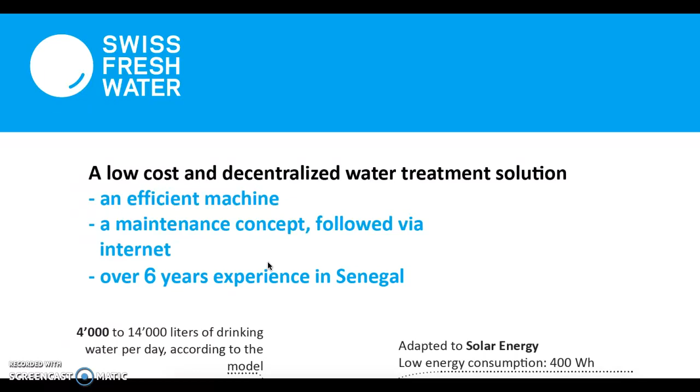So this is the technology that we are speaking about, and in our previous video we spoke about the project that we are going to implement in Pakistan, a country that up to 80% of its population is struggling to have clean, safe drinking water according to some estimates. So it's a low cost and decentralized water treatment solution that has an effective maintenance concept.

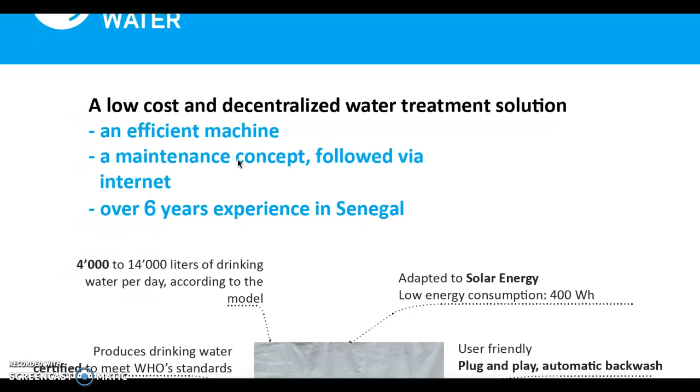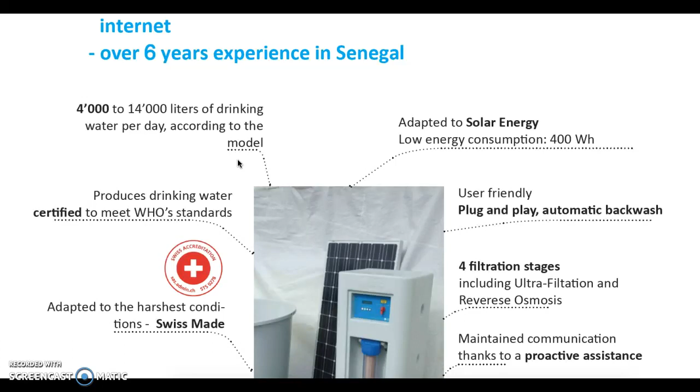So here's a clear advantage of this machine over any other machine: it has a clear maintenance concept that's followed via internet and which has over 6 years of experience in Senegal. So in Senegal, there are roughly about 150 machines that are running and doing very well, running at 100% efficiency, and all 150 machines are still in service after 6 years.

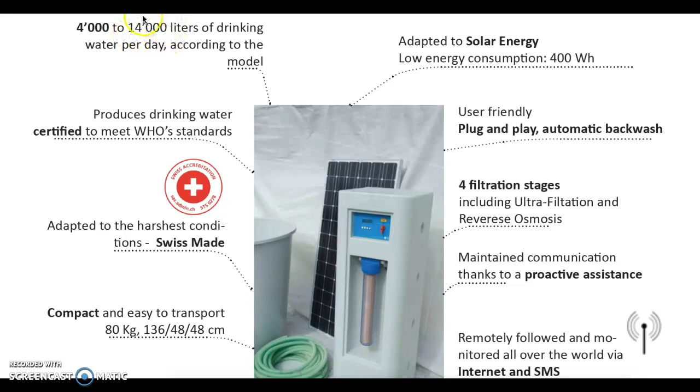Now, according to some models, you can tweak the output depending on whether you want a salt filter or not. With the salt filter, we're looking at 4,000 liters per day. And without the salt filter, we're looking at 14,000 liters of drinking water per day. As you can see, a very small and very mobile solution at 80 kilograms, 136 by 48 by 48. This machine will literally fit anywhere, and it's not difficult to transport.

With Swiss-made and Swiss accreditation, it's adapted to the harshest conditions, and it's very strong and robust. The advantage to this machine is that it produces drinking water that's certified to meet WHO standards. So we're looking at a high quality output, with a plug and play option, automatic backwash, 4 filtration stages, including ultrafiltration and reverse osmosis, and maintained communication thanks to a proactive assistance.

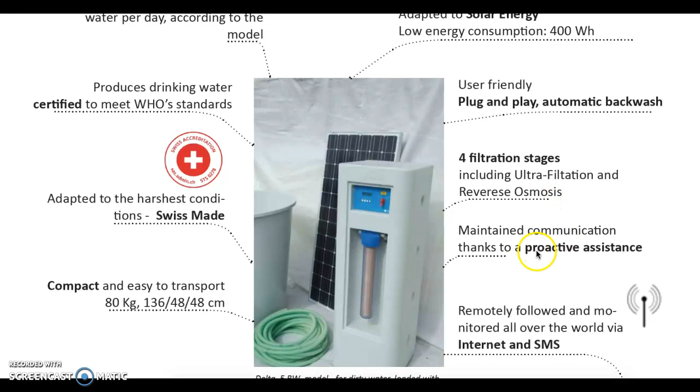So here's the advantage. Each machine is equipped with a SIM card that will give us all data regarding statistics, maintenance, spare parts, how everything is running. And as you can see here, there's also a solar panel in the background. So yes, the machine can be a completely off-the-grid solution. Here we see that in Africa, we have already embarked with several hundred machines, and all machines are fully operational.

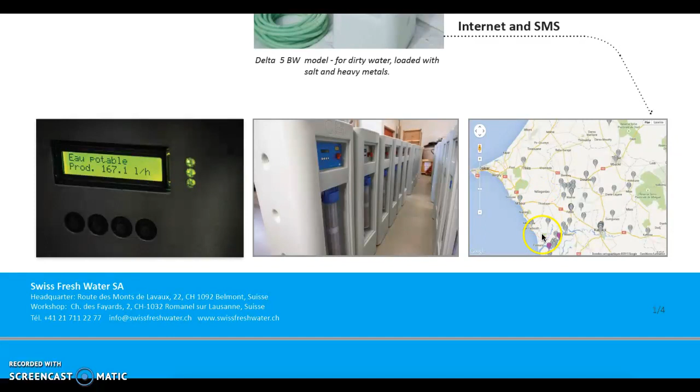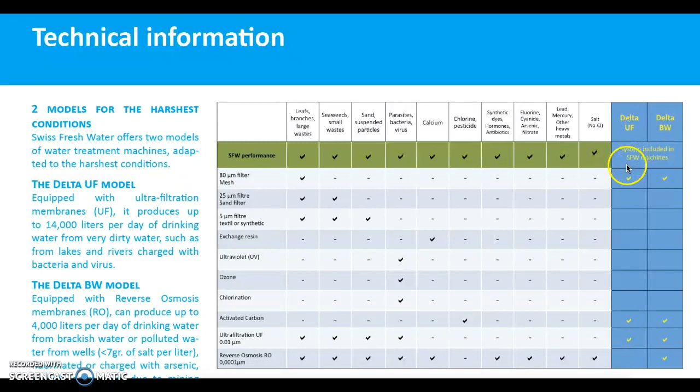Now, heavy metals is a big one in a country like Pakistan, especially because of heavy industry and mining. We can see here that it filters fluorine, cyanide, arsenic, nitrate, lead, mercury, and other heavy metals, and of course, salt. So less than 7 grams per liter of salt is included in this machine.

We're looking at different models here. One of the models that we spoke about earlier is the Delta UF model, which will have an output of 14,000 liters per day. And in this one, of course, we're not filtering salt. So if you take out the salt filter, then the output per day increases to 14,000 liters a day.

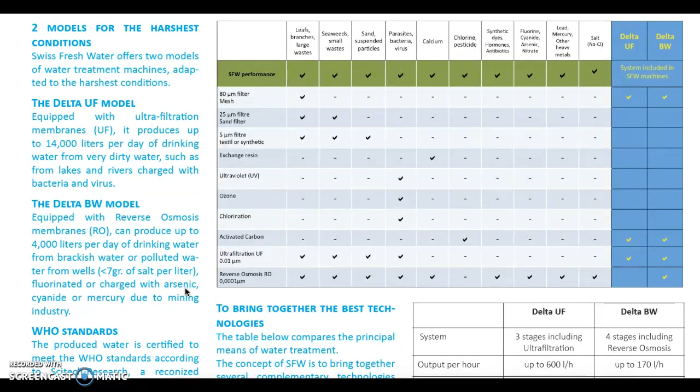The Delta BW model, equipped with a reverse osmosis membrane, can produce up to 4,000 liters per day, and it still clears out fluorinated or heavy metal charged water with arsenic, cyanide, or mercury.

So if we look at the different specifications, of course the machine is operable 24 hours a day, 365 days a year. And in an ideal context, the more it operates, the more efficient it runs. Let me repeat that. The more it operates, the more efficiently it will run, and the more we can successfully have higher efficiency gains.

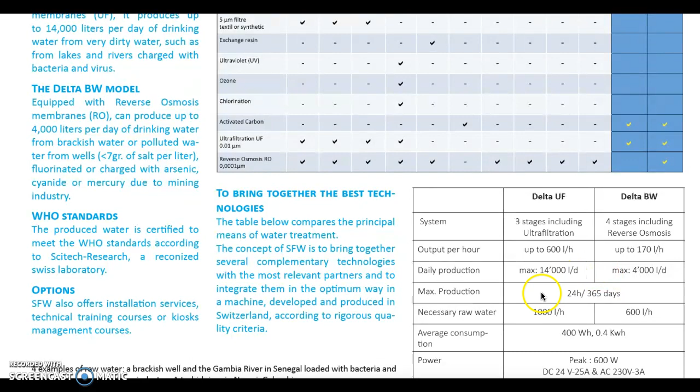We're looking at an output per hour of 600 liters per hour for the Delta UF model and up to 170 liters per hour for the Delta BW model. Daily production 4,000 versus 14,000. And we're looking at the necessary raw water to produce what we call 170 liters of output for the Delta BW model.

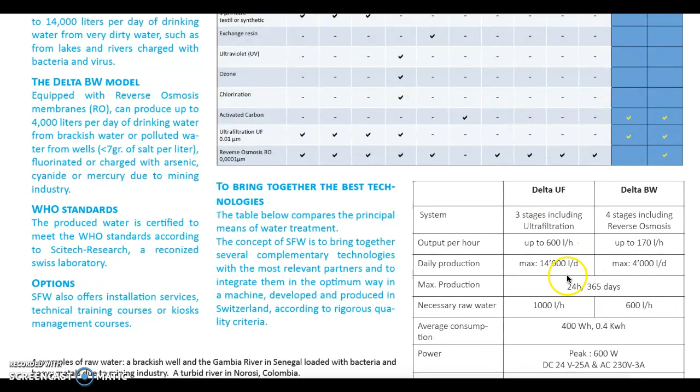Now here, of course, you might say that that's a low efficiency conversion, but in any reverse osmosis salt water production, we're going to have that inefficiency, and this is normal. As you can see, with the saltwater filter taken out, we're looking at 60% efficiency. So out of 1,000 liters per hour, we're looking at 600 liters per hour of output. The average consumption is 400 watts per hour, or 0.4 kilowatts. Power consumption peak at 600 watts, and we're looking at a 230 volt machine.

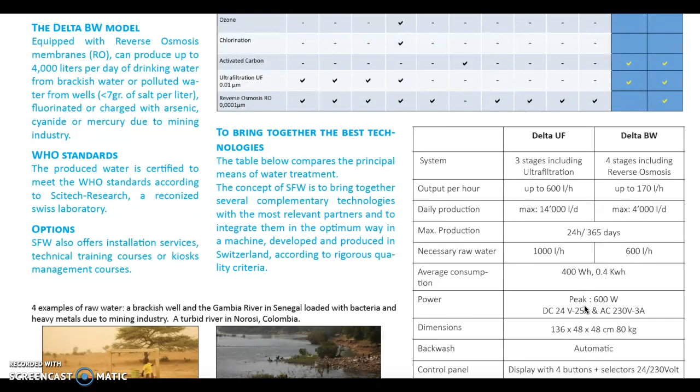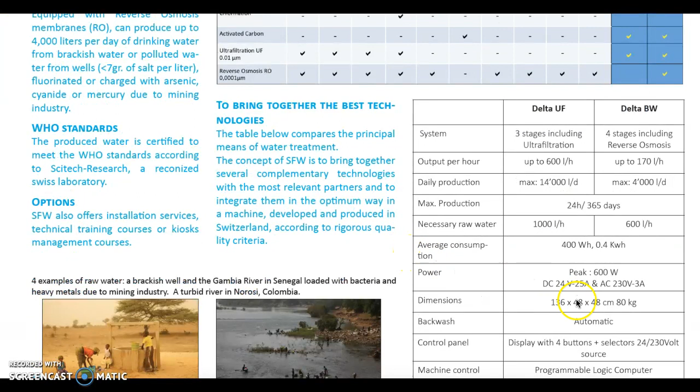Dimensions, we've seen here before, it's a very small and mobile machine. We're looking at 80 kilograms, height of 136 by 48 and 48. The backwash occurs automatically with the press of a button, very useful. And it has a control panel.

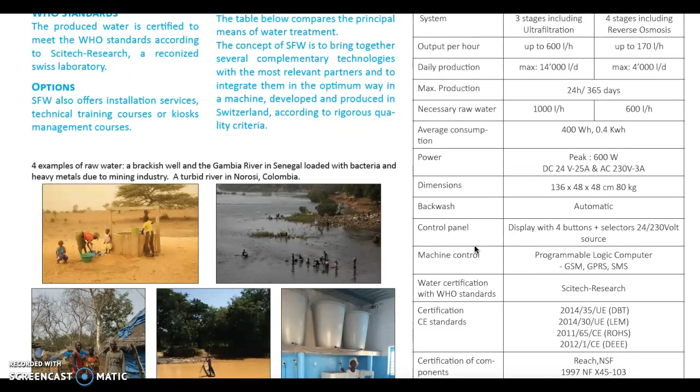Now the machine is programmable from distance. So it has a SIM card which goes into it, which is connected to the internet and which is connected by SMS as well. So the idea is that there are distance solutions to ensuring that there is a maintenance concept followed directly from Switzerland.

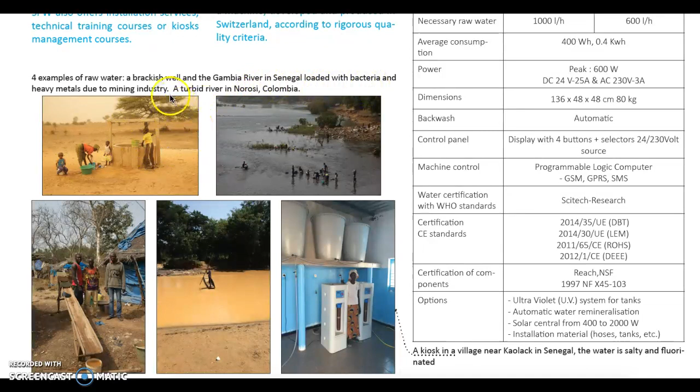Here we can see some pictures in Senegal. So for example of raw water, and here we see a brackish well and the Gambia River in Senegal loaded with bacteria and heavy metals due to the mining industry, and the machine is fully functional in that context.

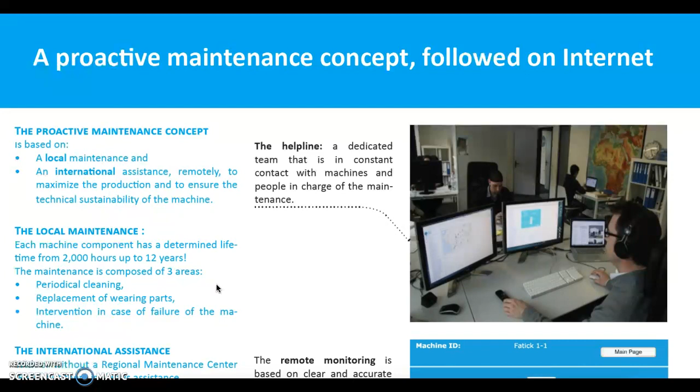Now, we spoke earlier about the proactive maintenance concept followed on the internet, and the proactive maintenance concept is based on a local maintenance. So we need a team on the ground that can be trained, who will be supported by an international assistance remotely to maximize the production and ensure the technical sustainability of the machine. There is a dedicated helpline in constant contact with machines and people in charge of the maintenance in Switzerland, who can, thanks to the SIM card, remotely access information regarding the machine.

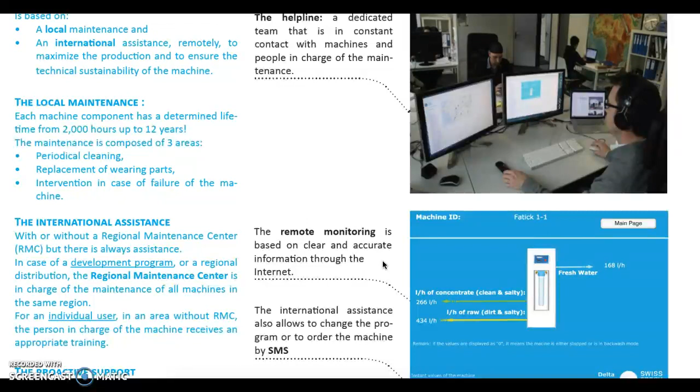Now, each machine component has a determined lifetime of 2,000 hours or up to 12 years. The maintenance, therefore, is composed of 3 areas. Each machine needs periodic cleaning. The machine needs replacement of wearing parts and intervention in the case of failure.

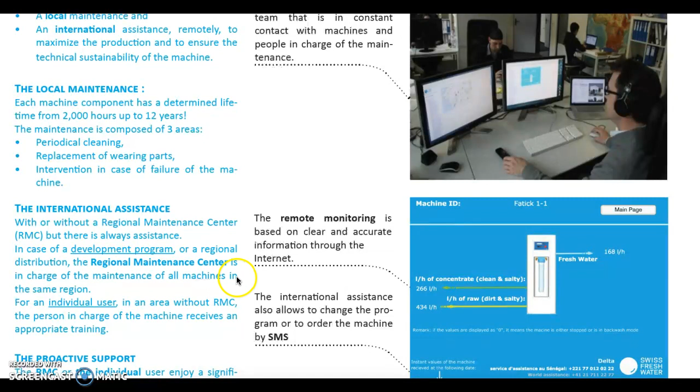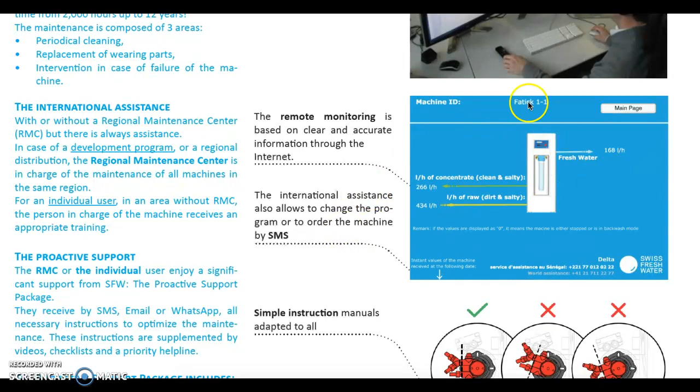The international maintenance concept is based on a model that either functions alongside a regional maintenance center or without a regional maintenance center. In case of a development program, the regional maintenance center is in charge of the maintenance of all machines in the same region. Now, the international assistance, of course, also allows to change the program or to order the machine by SMS. In case of any problems, the machine can be piloted remotely.

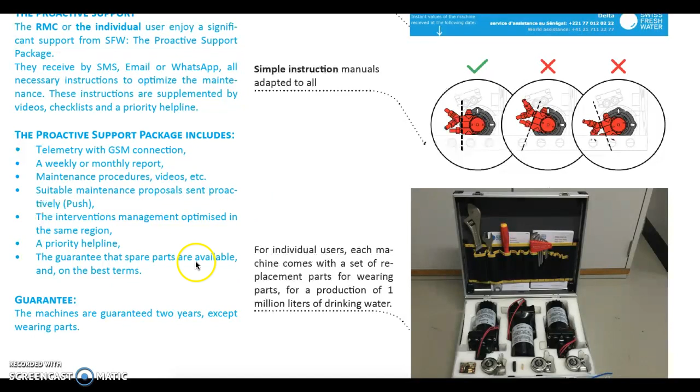The proactive support package includes telemetry with GSM connection, a weekly or monthly report, maintenance procedures, videos, suitable maintenance proposals, interventions in case of need, a priority helpline, and a guarantee that spare parts are available and on the best terms.

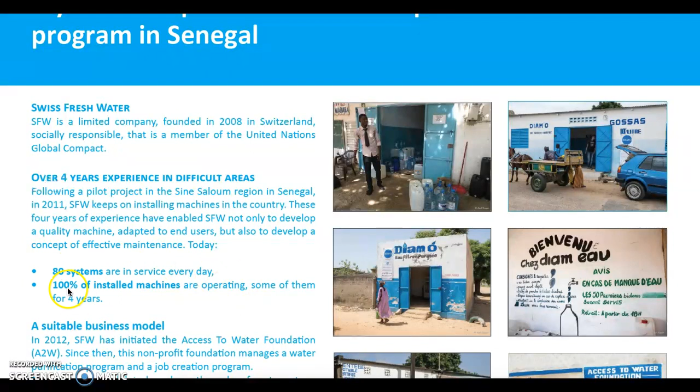Here is the project in Senegal with 4 years of experience. 80 systems are in service every single day. This has increased to over 100, and 100% of the machines are fully operating till this day. So that's in short a summary of the machine which we spoke about earlier, a proven concept, a mobile solution, a cost-effective solution, and a very adaptable one, especially to the Pakistani context.